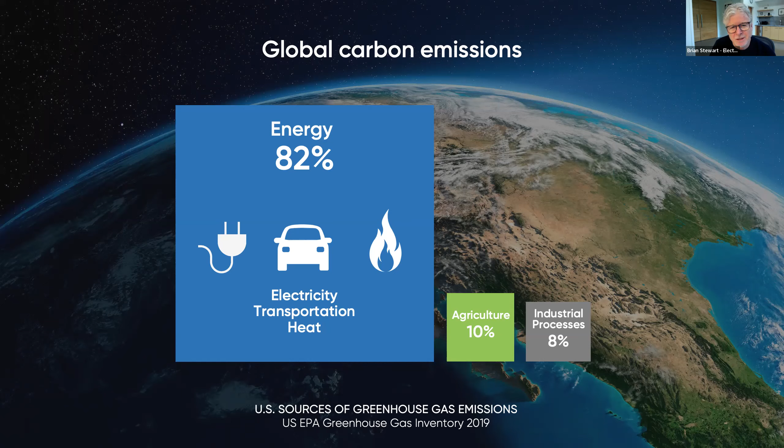Of course, there's some emissions from agriculture. You hear a lot about that. And in some countries it's bigger than 10%, but this is the United States number, and it just is dwarfed by energy.

And then of course, when you look at this at the household level, it's a similar story, that the vast majority of the emissions we're responsible for as individuals comes from the energy we consume. And think of it as the energy we purchase. This is the direct energy you're essentially buying with your electricity bill, with the gasoline you pump into your cars, and with your natural gas or propane if you're using that to heat.

Of course, there's emissions associated with the products that we buy and the food that we eat. But the truth is, if you really work hard, you can chip away and slightly reduce your emissions. You can buy fewer things, or buy things that are made locally, including food that's organically grown or regeneratively grown if possible, and grown nearby. Those will reduce the emissions from these two boxes.

But this big blue box is 60% of the energy of your footprint, that's from energy. It's entirely possible to reduce that to zero, eliminate it, have it go away, not just reduce it. We've done it in our home, and we've helped hundreds of people across Oregon and the United States do the same. That's kind of what we're going to be talking about today.

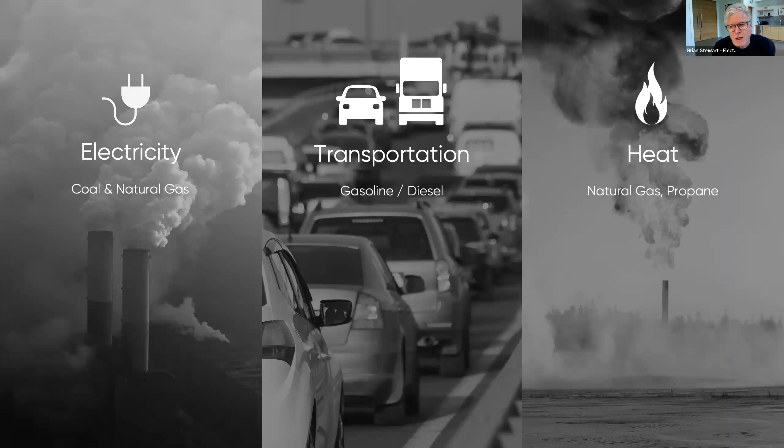So the bad news is that these emissions come from burning coal and natural gas to produce electricity, gasoline and diesel for transportation, and natural gas and propane for heating. And the bad news is we have to stop burning those things completely, not just reduce, but stop burning fossil fuels.

This is where it starts to get more optimistic, though, because wind and solar are now the lowest cost sources of new energy generation. This is happening all over the world. The prices for solar and wind have plummeted over the last decades, and they're projected to fall even further. They're now lower than any other source.

And what we're seeing right now is that gas prices and coal prices are going up, at the same time that solar and wind prices are going down. So you have this undercutting of the cost for energy, which is happening with renewables, and it's happening all over the globe.

The other thing that's happening is that battery prices are plummeting along that same kind of curve as they scale up. And so now that means EVs will be cheaper. They already are cheaper. From the studies I've been doing, you can see they're already lower cost now than they were even just a few years ago. This is really important, particularly for energy storage, for getting to a 100% renewable energy grid, because we'll need some forms of storage, including storage from batteries.

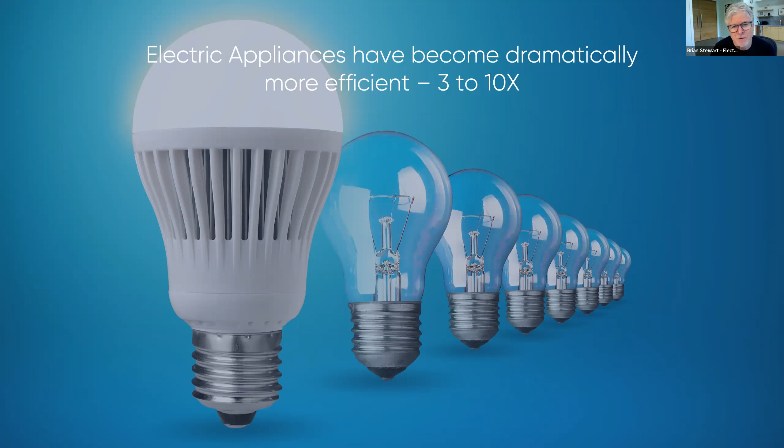The other thing that's been happening, which some of you may have noticed but happens gradually so it isn't as shocking, is that electric appliances have gotten dramatically more energy efficient over the last two decades. The LED light bulb is the poster child for that, because it's literally 10 times more efficient than an incandescent bulb. The same has been happening with our refrigerators, computers, phones, televisions—anything that uses electricity uses far less of it now than it did even 5 or 10 years ago. So you couple these insane efficiency improvements with electric appliances...

And by the way, those efficiency improvements have not been happening with gas burning devices. Furnaces are only single digits more energy efficient today than they were 50 years ago, with standards that have barely changed. And the fleet of gasoline powered vehicles in the United States has only improved overall fleet efficiency by a handful, like a couple of miles per gallon. It's literally flat over 30 or more years. So these efficiency gains have been happening with electric appliances, but not with gas appliances.

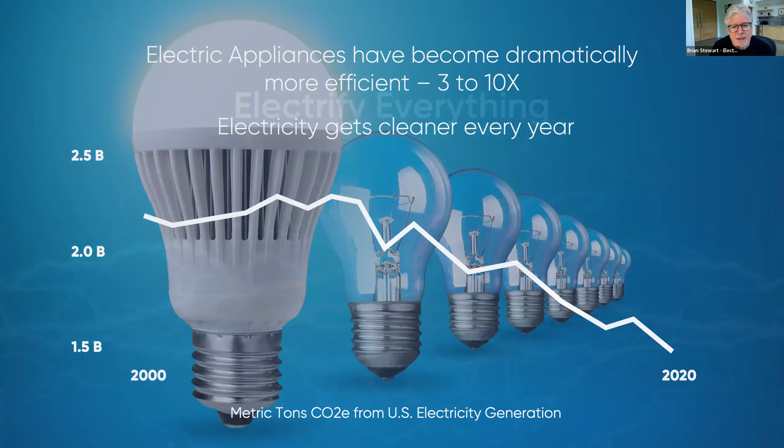And the grid has just been getting cleaner and cleaner, because we've been retiring coal and because renewables are becoming more available and scaling up. So when you combine all these things—efficient devices, cheap and clean electricity—it's hard to avoid the conclusion that we should be electrifying everything. You'll hear this terminology used often, as one of the most powerful tools we have to fight climate change. It conjures up the idea of a sustainable future where we have a new energy system powered by the wind and the sun, getting all of our primary energy needs from that for electricity, transportation, and heat.

It's an amazingly optimistic story, because along with cheaper and more available and abundant energy that is not overheating the earth, we also get cleaner air. Because where does air pollution come from? It comes from burning fossil fuels almost exclusively. We'll get cleaner water and more available water. The estimates about how much water is used for fossil fuel production and generation range from 10% to as high as 40% of available fresh water.

So more water, we'll have a stronger economy with better jobs that are safer and higher paying. And we'll have more equal access to energy. A lot of what we're seeing right now with the war in Ukraine, for example, is to some degree an outcome of this unequal distribution of access to petroleum and fossil fuels, which leads to levels of corruption that are just staggering at the corporate level as well as the state level.

And there is a much more equal access to energy because literally the wind and sun hits every part of the globe, and way more of it than we could ever consume. So that's all the good news.

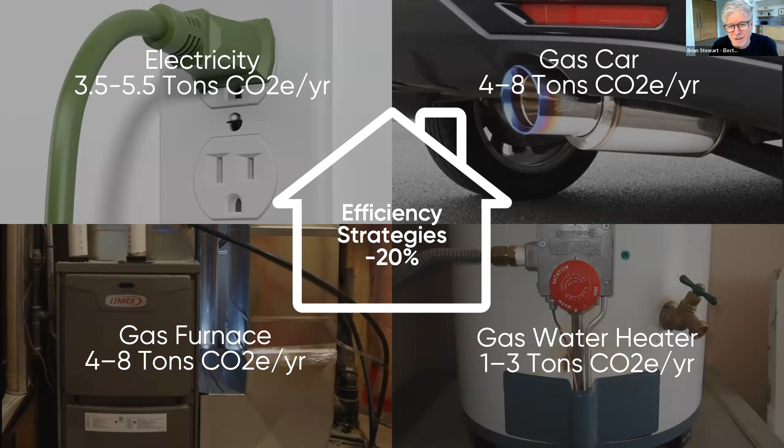And if you do a really good job of reducing—like trying to be smart about using less electricity, turn the lights off, drive your car slower, get a car that's as fuel efficient as you can get, drive less, turn your thermostat down, maybe take cold showers even—you might, with all these efficiency strategies, reduce your carbon emissions by 20% if you really work hard at it and deprive yourself of a lot of things you take for granted today. On the other hand, if you take these renewable energy and electrification strategies that we're talking about, you can get 100% renewable electricity.

So instead of 3 to 5 tons, you're talking about 0 tons per year for electricity. There's lots of ways to do this for most people in Oregon—we'll talk more about this. An EV charged with renewable electricity, and most people charge their EVs at home, produces 0 tons of emissions per year instead of 4 to 8. A heat pump powered by renewable energy also produces 0 emissions per year instead of 4 to 8. And a heat pump water heater, 0.

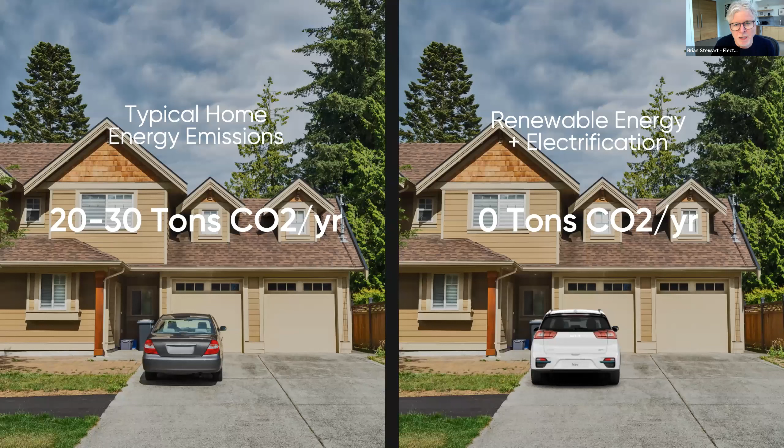So instead of a typical home, which produces 20 to 30 tons of carbon emissions per year, when you employ these renewable energy, efficiency, and electrification strategies, you can eliminate those emissions—they can go to 0. We've done this in our home, and many people around the state are doing this. We're trying to help people do this, partly by helping them understand the power of it, but also to help them understand that you'll save money.

Of course, there are transactions involved—you have to buy these expensive new things, but furnaces break, water heaters break, cars wear out. So when the time comes to replace your furnace, your water heater, or get a new car, it's really important that people like us are thinking about how amazing these alternatives are. Once you've done that, your annual utility and energy bills will go down.

So renewable energy plus electrification is a super powerful combination. It allows us to live in homes that are safer and more comfortable, which we'll talk more about. We can spend our energy dollars on the solution rather than spending our energy dollars on the problem.

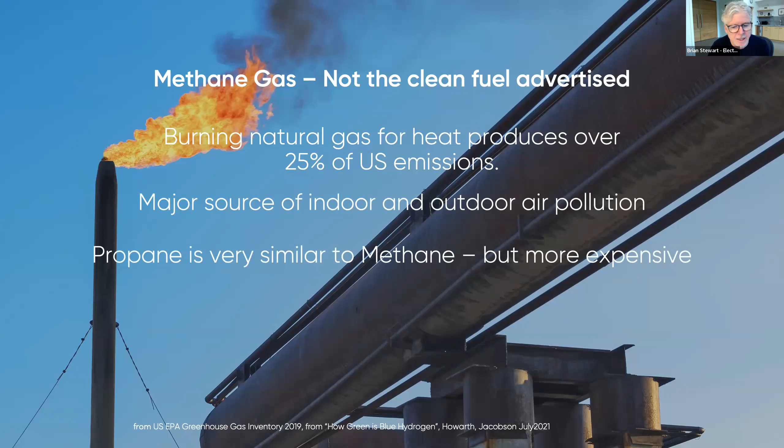Propane is essentially, for all intents and purposes, identical to methane in terms of what it does. It's more expensive because of the way it's produced and distributed. So for you there in Brookings or on the South Coast, if anyone is using propane, it's an expensive way to heat your home, but it has all the same negative climate attributes that methane has.

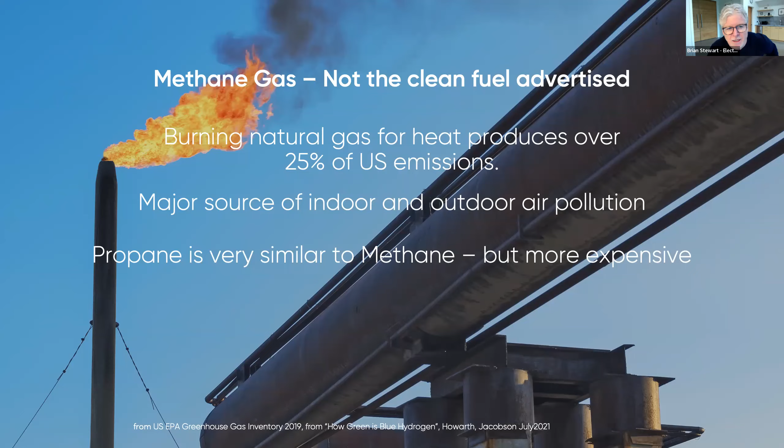The more we learn about methane and how much leakage happens throughout the system - from extracting it in the fracking fields, pumping it across the country, and refining it, even getting into our homes - there's immense leakage, which increases the global warming potential of this gas even further, because it's much worse unburned than burned. The more we learn about this, the more we realize methane is not really significantly cleaner than coal, and some people say it's worse in terms of its climate impacts.

I'm sure some of you are hearing about renewable natural gas because the natural gas companies are advertising this like crazy. It's a greenwashing marketing scam, really. There is a role for renewable natural gas in our future, but the idea that we'll be pumping this into our homes and just living our lives the way we are, burning methane or propane from renewable sources, is just a joke. There is simply not near enough of it. The most optimistic estimates say 15% is available, but that includes technology that doesn't exist today and sources that will be really hard to develop. And it's 2 to 5 times more expensive.

So the likelihood that renewable natural gas is going to save us is just a joke. Be very suspicious if you hear fossil fuel companies advertising that as a reason not to get off their product. The carbon emissions from propane or methane from a home heated that way are actually greater than the emissions from an automobile.

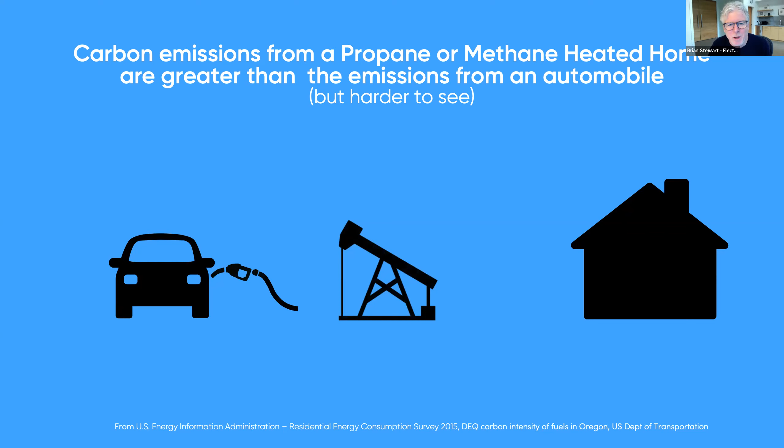But the thing is, we just don't see them. We're not as familiar with them, we don't interact with them as much. Part of that is because with an automobile, every time you go to a gas station, you plug the pump in, you can smell the fuel, you're aware it comes from oil fields. You start your car, you can smell it, you can see the exhaust.

So when I tell you that car is going to produce 4 to 8 tons of carbon emissions, it's probably not that surprising. But your home is a similar story - maybe you have a propane tank or you're on natural gas coming from a pipe underground. The flame is in the basement in your furnace somewhere, you hardly see it. The smoke comes out the smokestack of your home, you don't smell it or interact with it, but it's actually producing much greater carbon emissions than your automobile if you're heating your home that way.

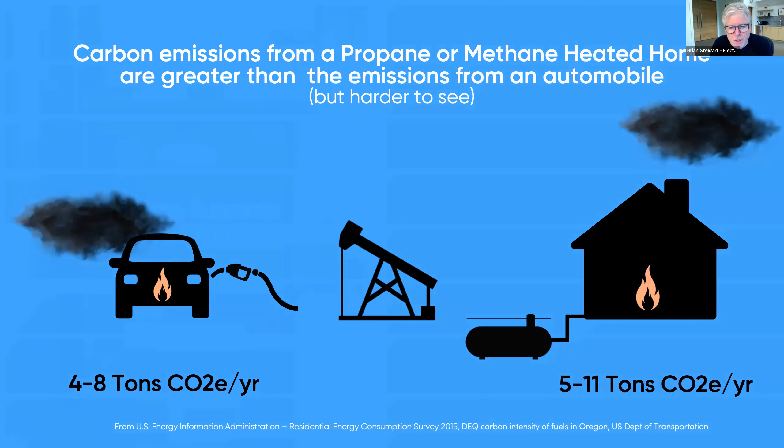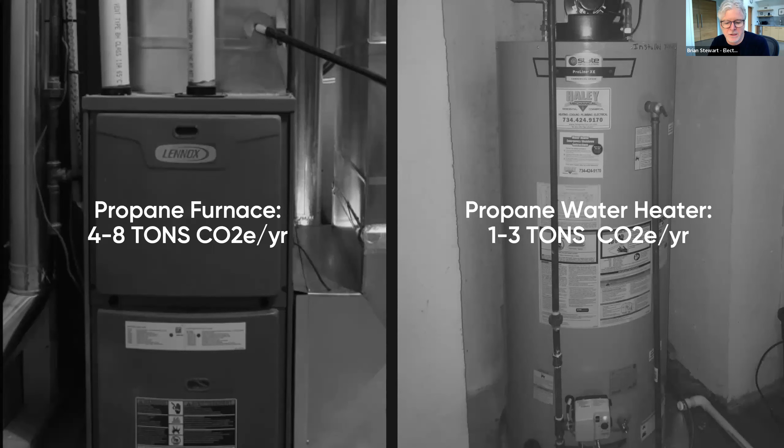And the big culprits are furnaces. A propane furnace is going to produce 4 to 8 tons of carbon emissions per year, same as a natural gas furnace, and same with a propane water heater, 1 to 3 tons. These are the largest sources of carbon emissions in most homeowners' lives.

So if a ton of carbon emissions is hard to get your brain around, think about it this way: imagine you and I were walking down the street and came across a pile of garbage with 100 plastic bottles, 100 plastic bags, 100 forks, spoons and knives, 100 of those horrible plastic takeout containers, 100 plastic yogurt cups, and a thousand straws mixed into this pile. You'd be up to your knees, and you'd be horrified to know it created 23 pounds of carbon emissions to produce all that plastic waste.

But one day of heating your home with propane will produce almost double the carbon emissions of that pile of plastic trash, and 1 gallon of gas produces even more than that. So if it helps you to think of plastic trash as a kind of currency for carbon emissions, I invite you to think that way.

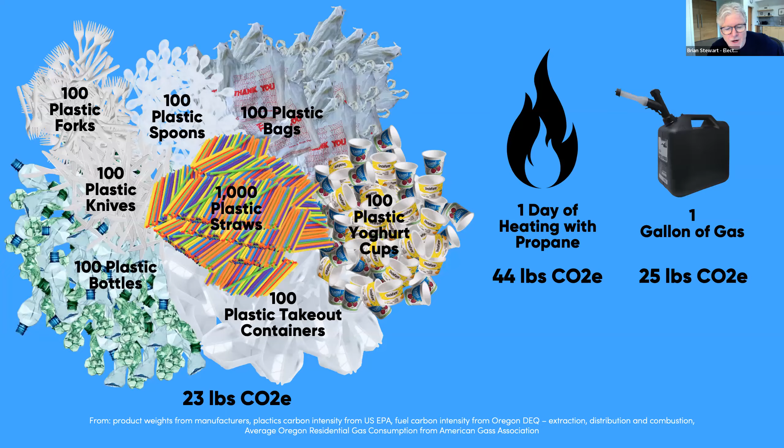An example: if you're heating your hot water with propane or natural gas, the carbon emissions from heating one tub full of hot water is pretty close to the emissions produced from the plastics that would fill your bathtub with plastic trash. If you think of it that way, it might ruin your hot bath, but imagine filling your bathtub with plastic trash - that's kind of the environmental impact of heating your water with propane.

All right, so what's the solution? The solution is heat pumps. And heat pumps are a little bit magical - a lot of people don't really understand the way they work. I have a quasi understanding of them, but we don't really need to understand them.

I think it's important to realize we've had them in our lives throughout - most of us have had them our whole lives, and your refrigerator is a heat pump. The way heat pumps work is they move energy from one place to another - that's why they're really efficient. They don't create heat, they don't create cool; in this case, they're moving heat from one place to another. Your refrigerator is literally moving heat from inside that insulated box into your kitchen.

So your kitchen gets slightly warmer. You may notice this if you put your hand behind your refrigerator - you'll feel the hot air coming from there, or sometimes it blows out from underneath. Essentially, it's just transferring heat from one place to another, and it's insanely energy efficient. It takes much less energy to move heat than it does to create it.

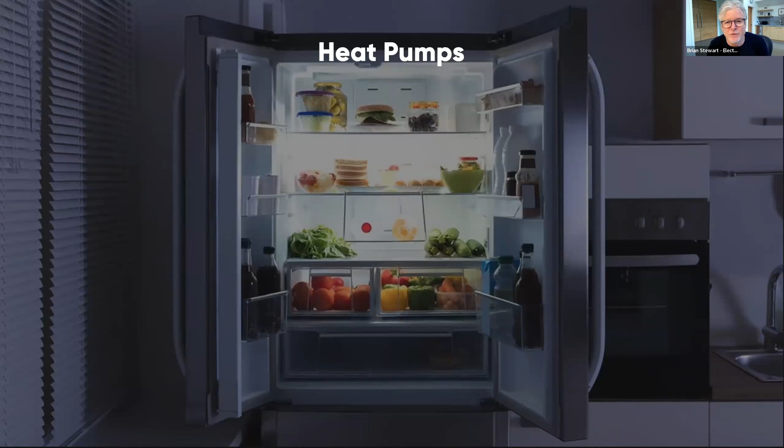And they're incredibly effective. Last year, before we turned our air conditioning on, we had temperatures in our house over 90 degrees, and yet our refrigerator still was making ice. So that's a temperature difference of over 60 degrees.

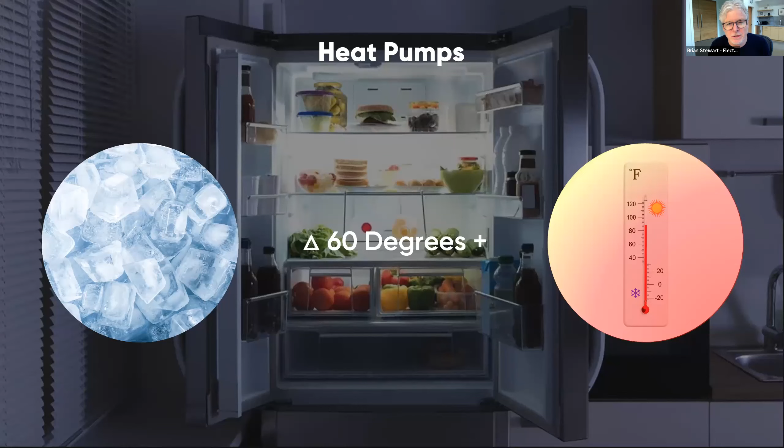So even though the kitchen is hot, it can still heat the kitchen up and cool what's going on inside your refrigerator. So they're insanely efficient. These same devices can be used to heat our homes and to cool our homes. Air conditioners work in the same way.

Basically a heat pump is made up of two pieces of equipment: essentially a condenser, often called the outdoor unit, that looks a lot like an air conditioner. If you have an air conditioner, it's essentially the same thing. Then there's refrigerant lines that connect it to an air handler that basically replaces a furnace if you have a ducted furnace in your home.

So basically this system can blow either warm air through your ducts to heat your home, or the same system can blow cool air to cool your home in the summer. And they're incredibly energy efficient, which we'll talk about.

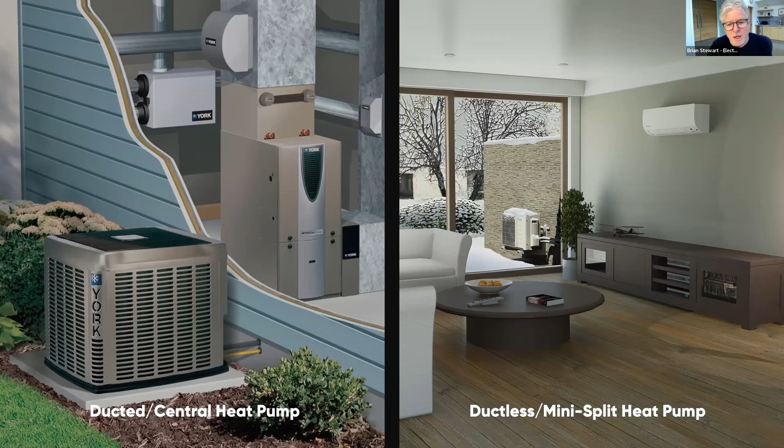There's other versions made up of a similar outdoor device, but instead of ducts, they're ductless. They're called ductless or mini splits that can be mounted on the wall. Basically these devices circulate warm or cool air through your home in an incredibly energy efficient manner. These things are insanely effective.

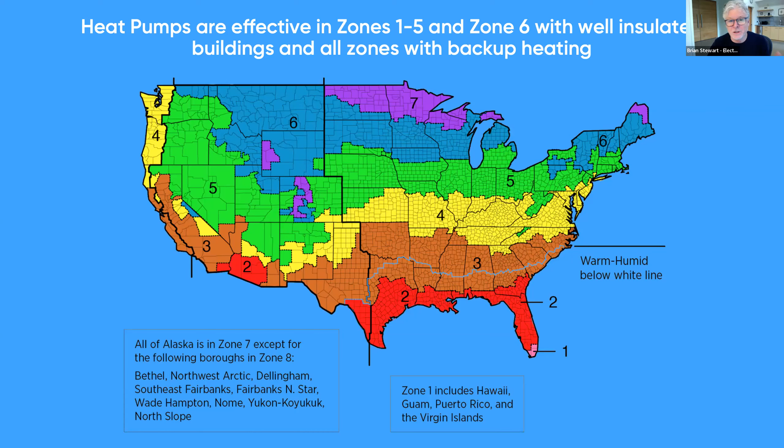It can work in the coldest climates. They're being used in Alaska, Vermont, Norway, Montana, places like that. They don't need to be as efficient in the kind of climates we have here on the coastal part of the United States. And in southern parts of the country, they're being used all the time. But like I said, the more efficient ones can work even in really cold climates.

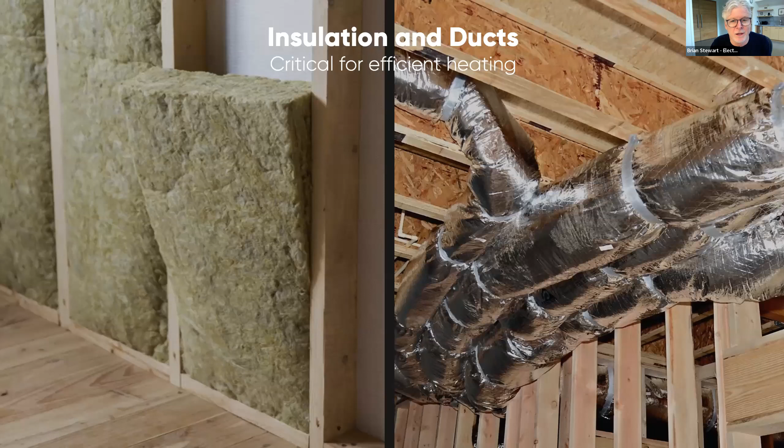It's important that the spaces we're using to heat and cool are well insulated, because a gas furnace produces literally thousands of degrees of temperature. So you can kind of get away with a poorly insulated space because it's just blasting out insanely high temperatures and using a lot of energy to do that.

Heat pumps are more efficient. They operate at lower temperatures. So having a well-insulated space is really important to maintain comfort and energy efficiency. And ducting is one of the things people often forget about, but leaking, uninsulated ducts can lose you 25% of your energy just by having poor duct work.

So if you're contemplating doing an upgrade to your home, make sure you talk to people about insulation in your home. That's really important. And ductwork, that's an important thing to consider.

But let's talk about cost, because heat pumps are just insanely more energy efficient and therefore much more economical to operate. And we're going to use electric baseboard heating as a starting point, because I imagine a lot of you might be using electric baseboard heating in your area.

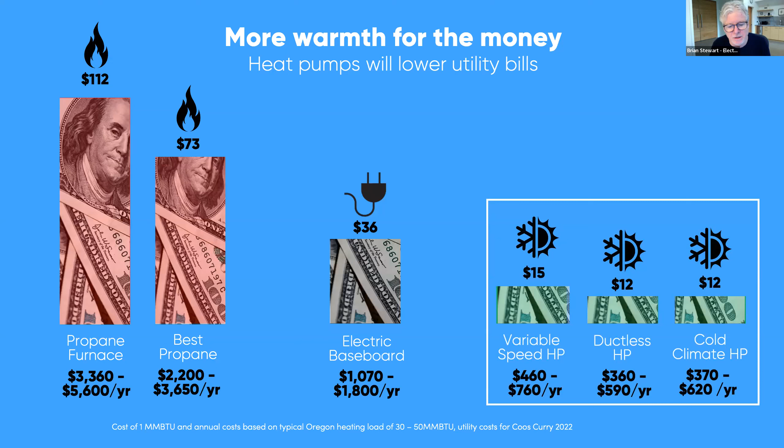Now let's look at heat pumps - about half as much as electric baseboard heating. I'm showing 3 different versions. The ductless one was the one we showed, where the mini splits are those units on the walls. Those are typically incredibly effective and efficient units. You can get even a modestly effective one for about $15 per million BTU, so you can see it's about half the cost of electric baseboard heating.

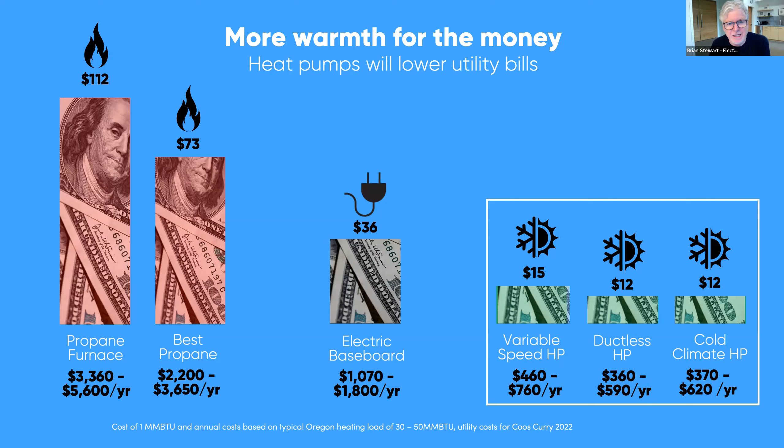And if you get a cold climate heat pump, these really efficient ones, with no electric resistance backup heating or anything, they'll heat your homes down to -5 degrees Fahrenheit when it's that cold outside. Incredibly effective - $300 to $600 a year for heating. So you can see that they're much cheaper to operate.

And when it comes to carbon emissions, they blow anything away. Electric baseboard isn't bad where you are because your electricity is so clean, but I don't recommend it as a heating source because it's so expensive compared to these other versions. And if you don't have clean electricity, it really is important that you have more efficient devices.

But you can see the heat pumps just blow away the natural gas devices in terms of carbon emissions.

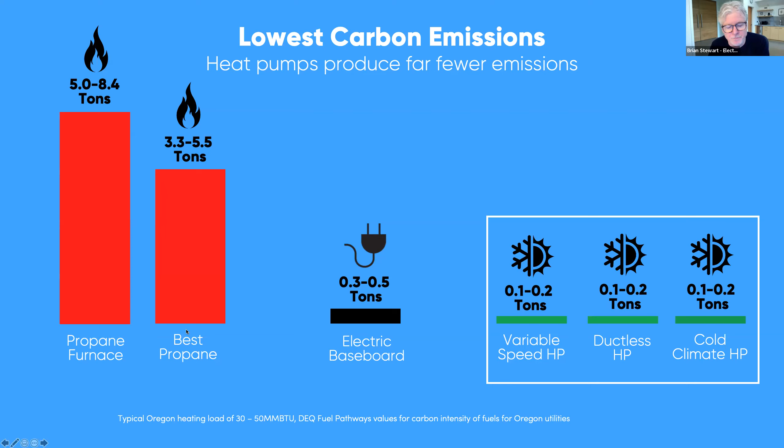The heat pump water heater works the same way, except it's all in one unit. There's an evaporator and compressor up top, driving that coolant around the tank and heating the hot water. Most people don't really care how it works.

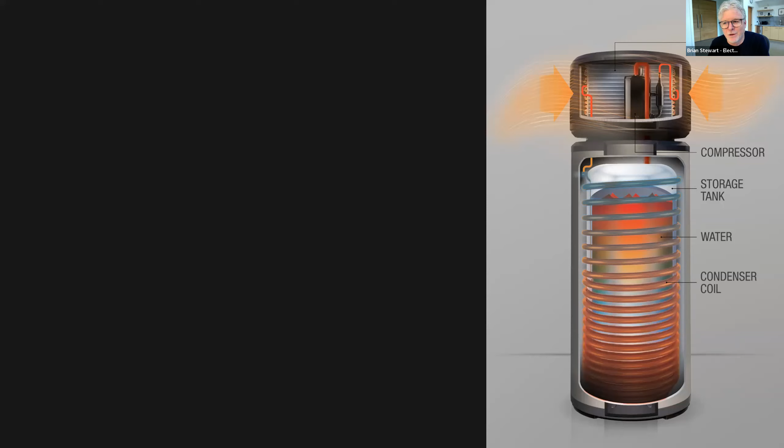It's important to know these devices need quite a bit of space around them, so you can't put them in a small closet. You don't want them in your conditioned space because they will cool your space, but they're great in basements—that's where we have ours. Garages are also a good place to put them. They look just like regular water heaters for all intents and purposes.

Most people just care about the fact that they get hot water, and these things will do that and also save you a lot of money. This is what EnergyGuide has to say.

Anytime you buy a new electric device or any kind of fossil fuel burning device, it'll have one of these energy guide labels on it. You'll see that the US government says it's going to cost you $650 a year to heat your water with propane. Actually, it's double that in your area, because propane is roughly twice the national average where you are—I'm not sure why that is, but that seems to be the case. So it's more like $1,000 to $1,200 a year for a propane water heater. The best electric resistance water heater is going to be more like $400.

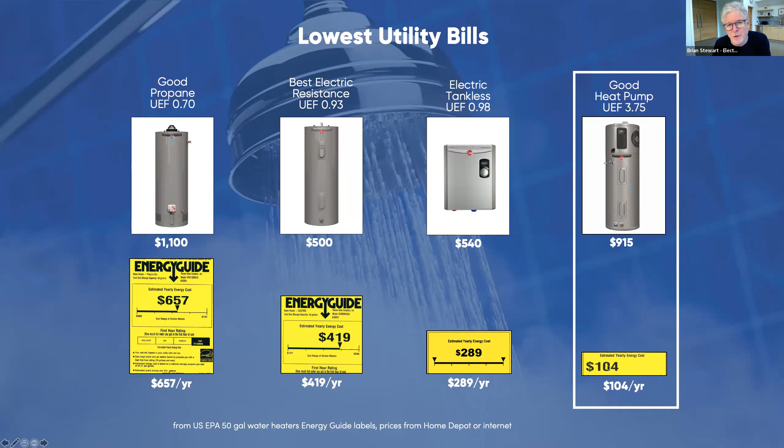Even with tankless water heaters—a lot of people think tankless is better, and it is slightly better—you're still talking about close to $300, compared to $100 for a heat pump water heater per year to heat your water and get all the hot water you need. And in terms of carbon emissions, again, the heat pump is going to blow everything away.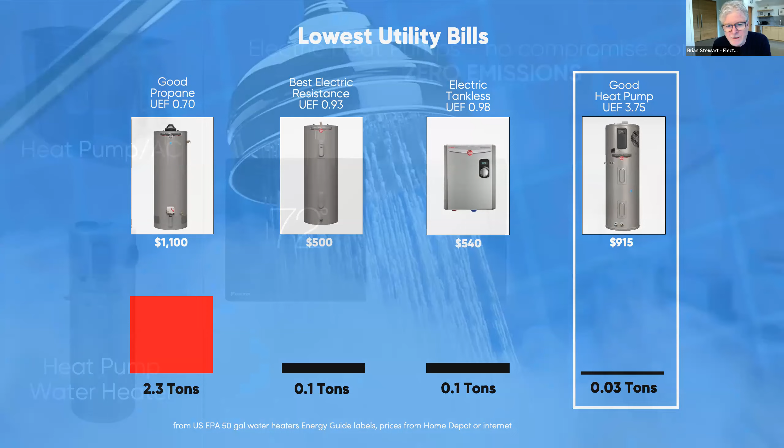That's why it's so important for people to know about electric heat pumps. They're just unbelievable. They've been used in Asia and places like that for literally 30 years, but around here, most people don't even know about them. So it's important for us to know about them and embrace them when the time is right in our homes. By doing that, particularly if you're using fossil fuels for heating, you're going to avoid 5 to 11 tons of carbon emissions per year.

The other reason to do these things is indoor air quality. The more that's learned about gas stoves—most of the research has been done on methane burning stoves, but it will be similar for propane because the combustion byproducts are very similar—there is carbon monoxide and nitrogen dioxide emissions that come from burning these fossil fuels in our homes. And unless you have a really, really effective exhaust system...

...and unless you turn it on before you start cooking—and most people forget—even within the time it takes to fry an egg, you're going to have indoor air pollution that would be illegal if it was happening outside. The correlation between gas stoves and asthma, particularly in children, is extremely high. I know a lot of asthmatic people who can tell you when they walk into a house whether there's a gas stove, just because they can feel it immediately.

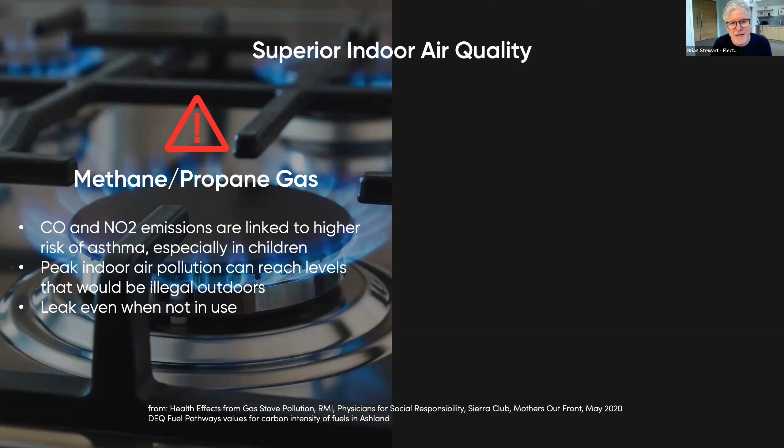Induction is unbelievably superior, much better to use. The control and heating times are literally twice as fast to boil water with an induction stove than with a really high efficiency, high BTU gas stove. They're much easier to clean—you're talking about a sheet of glass compared to all the nooks and crannies with gas stoves, which I'm sure you're all familiar with.

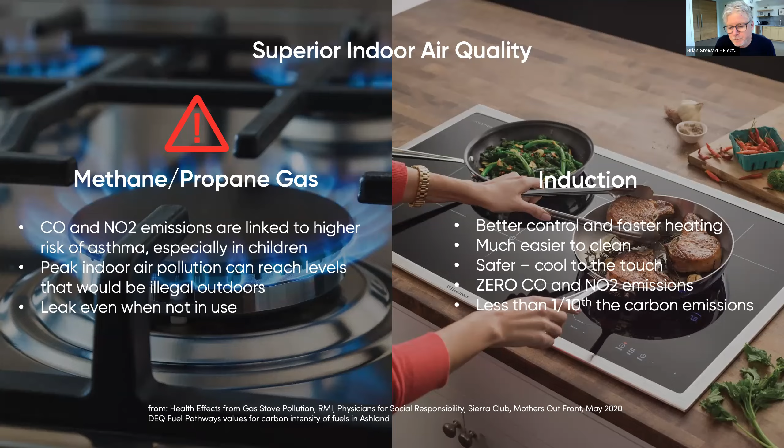They're safer because they stay predominantly cool to the touch. They produce none of the carbon monoxide and nitrogen dioxide emissions, and less than one-tenth of the carbon emissions where you are compared to propane.

Anything that burns fossil fuels, whether it's your barbecue, your gas fireplace insert, or your gas-powered lawn tools, can be replaced with electric alternatives that work better. They give you superior air quality, you don't have to refill them, there's virtually no maintenance, you don't need any tune-ups, and they're easier to clean.

So electric, whenever you can—replace anything that burns fossil fuels with an electric device. And if possible, your aspiration, if you have propane for heating in your home, would be to ditch the tank, get rid of that thing, save yourself thousands of dollars a year in expenses, avoid the propane leaks happening in your yard and home, and help scale back the gas system, which is a huge part of the climate emissions problem.

Okay, so let's talk about transportation. A huge portion of our carbon emissions in the country come from transportation. In the United States, here in Oregon, it's more like 40% of our emissions, not 30. And most of it comes from our cars. A lot of people think about air travel, and yes, that's important, but it's our cars and light trucks that are the majority of emissions.

That's because a gas burning car will produce, like I said before, 4 to 8 tons per year, every year. If it helps you to think about the equivalent with plastics, imagine every time you fill your gas car up with gasoline that you're stuffing it with plastic waste. That's essentially the equivalent in terms of carbon impact.

And the alternative is an EV that you charge with clean electricity, because you have it there in Ashland, and it will produce close to zero carbon emissions per year. Costs are plummeting on batteries. We'll talk about charging infrastructure getting better and better all the time. I'll talk a bit more about that.

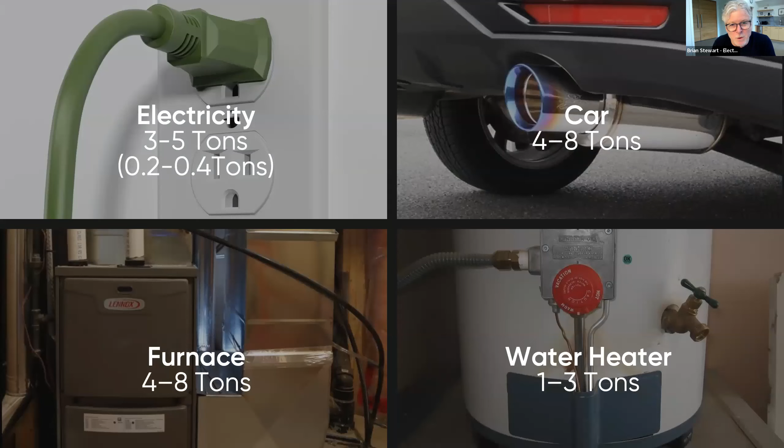Like I said, in your case, electricity is clean, but on average, it's one of the really big ones for most people here in Oregon.